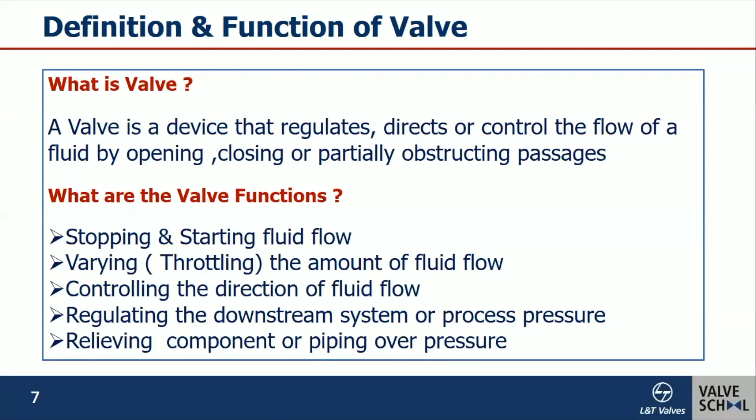You will all agree that if you want to have command on any subject, you need to understand the fundamentals very clearly. So that's what we are going to spend a few minutes on, understanding the valve fundamentals. Basically, there are two known ways of controlling the flow of liquid or gases. All the valves you see around you are, in essence, based on these two principles. Let's see what they are.

Imagine a water tank filled with water, with an outlet at the bottom. There are two ways by which you can stop the flow. One, by putting your thumb against the orifice, you can stop the flow. Or, if the tube is flexible, you can squeeze it and stop the flow. These are the two fundamental principles on which all the designs are evolved.

The first principle is again developed into three different methods. What you see here, the first principle is divided into three different approaches based on the way the stopper is presented to the orifice.

The simplest method of moving a stopper is moving by direct thrust onto the orifice, like what you see here, and this is the basis of all your globe valves. Imagine if the stopper is rotary, and by rotating movement, you can stop or start the flow. This is the basis of all your quarter turn valves: ball, butterfly, and plug.

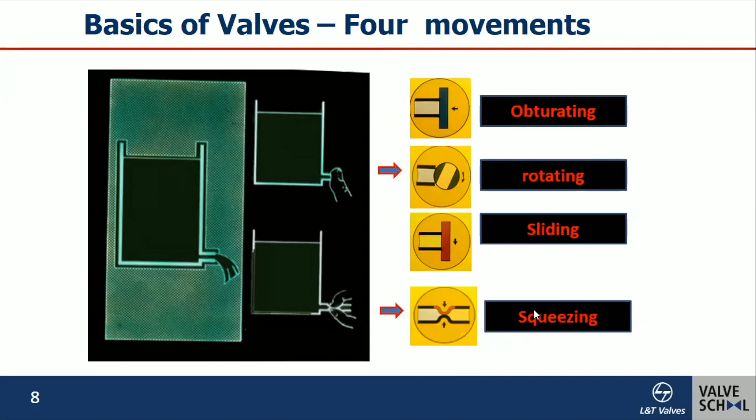So now let's see how these principles are evolved in making the design for valves. If you take a globe valve, you will find the closure device, which we call an obturator, is moved in a linear direction in the seating area, parallel to the flow, along the longitudinal axis.

And if you take the quarter turn valves like ball and plug, you will find the closure device rotates about an axis at right angle to the direction of flow. In the open position, you will find the flow taking place through the closure member. On the other hand, a butterfly valve is again a quarter turn valve, where the closure device rotates about an axis at right angle to the direction of flow.

But when the flow takes place in open position, the flow goes around the disc. When it comes to sliding gate valves, the disc moves in a linear direction perpendicular to the flow. And of course, the diaphragm valve is one where the deformation of this diaphragm gives you the tight shut-off. So we see 4 different movements of the closure.

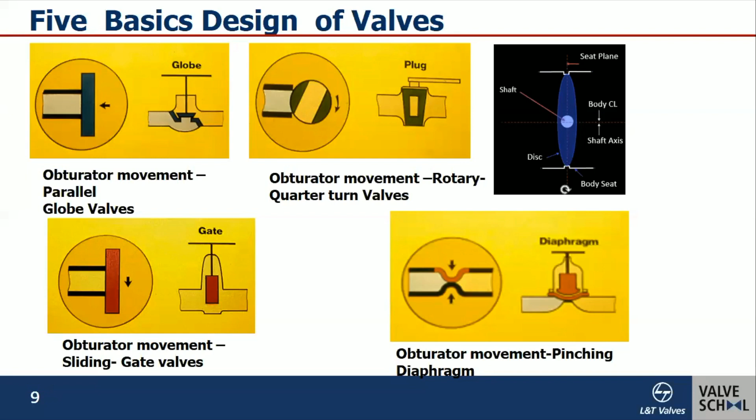We were able to develop 5 basic designs, and whatever we see around us can be fitted into this variant. This slide shows how different types of valves are fitted into these fundamental principles. And this is not an exhaustive list.

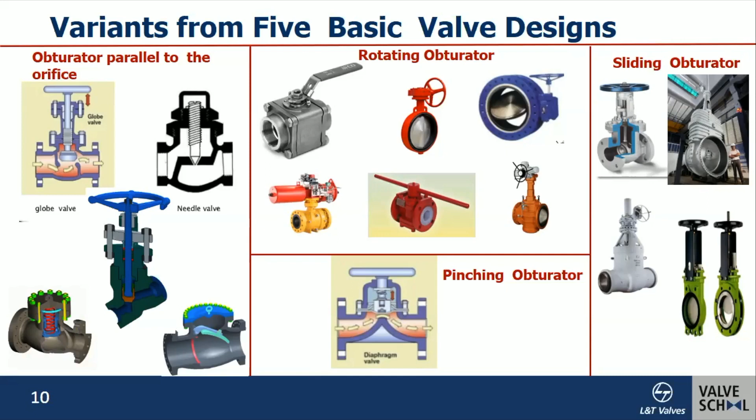Basically, from this categorization, we can have 2 categories. One is the linear motion valves, called multi-turn valves. The other, rotary movement valves, can be called quarter turn valves. So these are 2 broad classifications you will see.

Now let's move on to understand the characteristics of each generic valve. The globe valve, what you see here, is a globe valve. Its advantage is that the direct thrust of the disc onto the seat is seen here. This feature gives a tight shut-off characteristic for the valve. One can feel the valve is closed and is positive.

The internal flow, if you watch, takes 2 right angle turns. This gives a pressure drop, and this pressure drop characteristic helps this valve to be used as a regulating valve. This regulating characteristic is nothing but a known relationship between the movement of the disc and the quantity of flow.

And that's why you will find globe valves are more popular as a control valve. Another important aspect is that when used in throttling or regulating applications, the flow is perpendicular to the seat area, so there is even wear and tear. That's why, unlike other valves, these globe valves are able to sustain as a control valve.

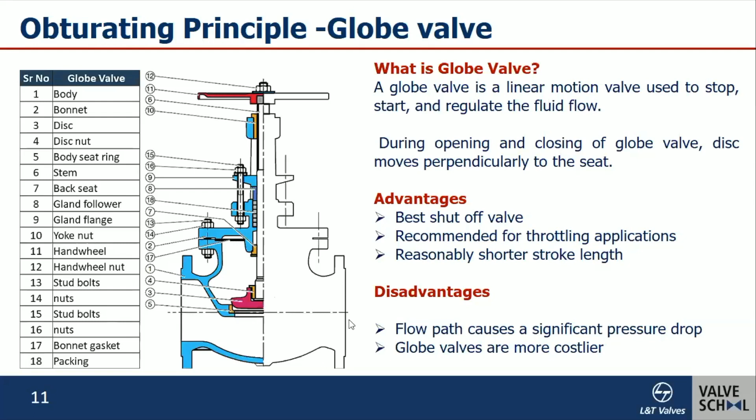Now let's move on to the plug. The plug belongs to the quarter turn category. It is straight flow through, and consequently the pressure drop is less. It is quick acting because it requires only 90-degree operation. Another advantage of the plug is that the seating area is protected from the effects of the flow. Hence it finds wide application in handling slurry media.

The disadvantage of the plug is difficulty getting a tight shut-off with ease of operation. Another disadvantage is that, because it is fast acting, it can cause water hammer effects in certain hydraulic applications. There are 2 types of plug valves.

One is lubricated and the other non-lubricated. Lubricated plug valves use lubricant, and non-lubricated plug valves use soft materials, elastomers, polymeric materials. This puts a limitation on the temperature, so temperature is limited by these materials.

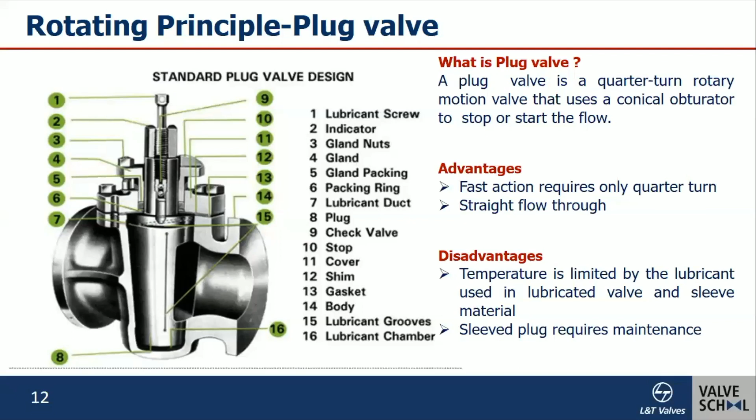Now let's move on to the ball valve. I would say the development of a plug is a ball. Similar to the plug, the ball also requires quarter turn movement and is also fast acting. The main advantage of the ball valve is flow is through and through, with no obstruction, offering the least resistance. That's why ball valves are very popular in cross-country pipelines where they need full bore valves.

The advantage of a ball over the plug is ease of operation. If you see the plug, the entire plug is enveloped in the body seat, whereas in a ball, the ball is in contact with the seat only through a segmental link, which helps give a low torque.

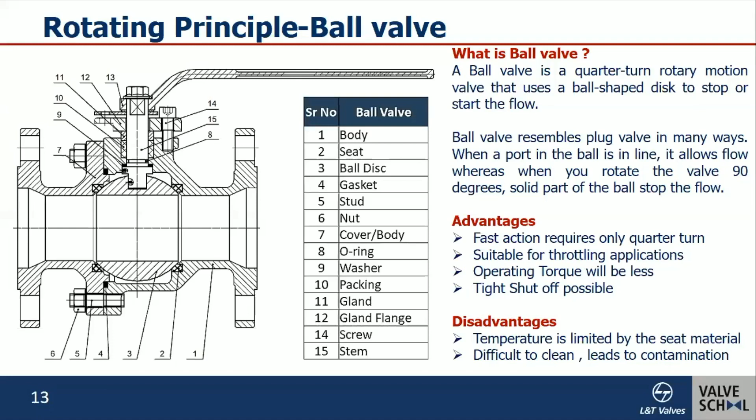In addition, using soft seats like PTFE, which has a low coefficient of friction, helps reduce the operating torque. So these valves are best suited for tight shut-off, suited for limited throttling applications, and best suited for fast action. The temperature is again limited by the seat material—there are metal seated valves, but soft seals used will put a limit on temperature.

Then we'll move on to the butterfly valve. It's again a development of a ball valve, I would say. It's quite compact, quick acting, and easy to operate. It is well suited for regulation. Next to the globe valve, I think butterfly valves are very popular in control applications.

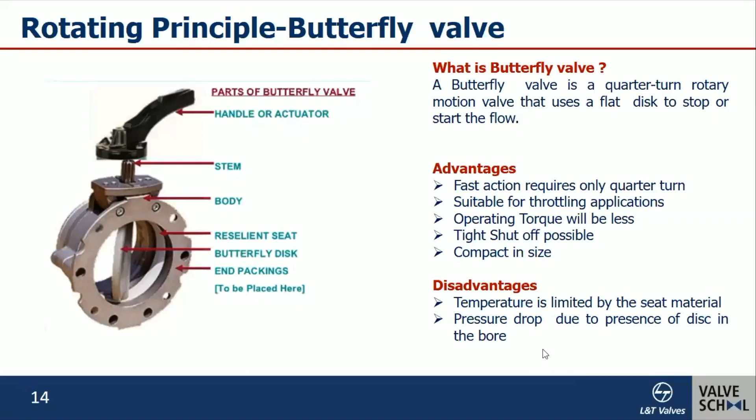The only disadvantage with the butterfly valve is that the disc is always present in the flow passage, hence it offers resistance, and the pressure drop is high. As a thumb rule, for a given size valve, the pressure drop in a butterfly valve is about 3 times that of a gate valve. It is also limited to smaller pressures, not high pressures, because for high pressure, the disc thickness becomes very massive and the flow area gets obstructed. Another disadvantage is when you use a resilient seat for tight shut-off, that puts a temperature limitation on this, and pressure drop is high due to the presence of the disc.

Then we have the most popular valve in the industry, which is the gate valve. Gate valve is a straight flow-through when the valve is open and offers the least resistance, least pressure drop. Being metal seated, there is no soft seat in the body of the valve, and it can be used for high temperature, high pressure applications. That's why you'll find more such valves used in the process industry, refineries, and wherever high temperature and pressure are involved. The disadvantage of a gate valve is that it is the slowest acting valve. Why? Because the wedge has to move through the bore to clear it to reach the fully open position. So wherever fast action is required, you have to stay away from the gate valve.

The second disadvantage is it requires a lot of headroom. And this valve is not suitable for throttling application. It is best suited as an on-off valve. In throttling application, when used at an intermediate position, the disc is subjected to vibration, and a lot of wear and tear takes place. Hence, it is not recommended for throttling.

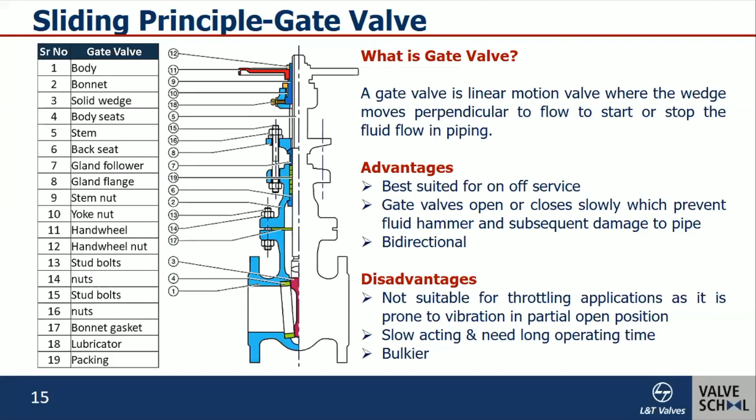Then we have diaphragm valves, which are also called glandless valves. There are 2 advantages of diaphragm valves. One is the diaphragm is flexible and gives a positive shut-off. That's why it's suited for all slurry or solid materials. All your sewage lines will use this type of valve. The disadvantage is that due to the diaphragm material, the temperature range is limited.

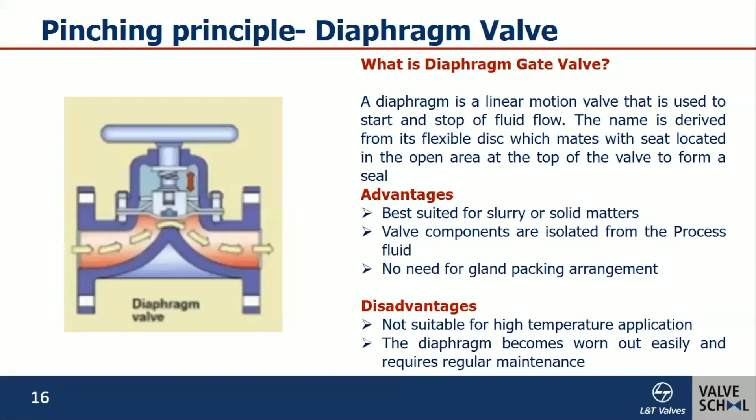To summarize, the 4 basic variants' advantages and disadvantages are shown in the slide. I don't want to repeat it. All I want to say is quarter-turn valves are quick acting, and except for the butterfly valve, the rest of the quarter-turn valves like plug and ball have the least resistance. In the multi-turn valves, globe and gate, they require a longer time to operate. The globe valve is best suited for on-off as well as regulating applications, whereas the gate valve is suited only for on-off application, not for regulation. So it is better to understand the differences between these variants, so that when you select or use a valve, you will be able to remember these characteristics and apply them in your day-to-day work.

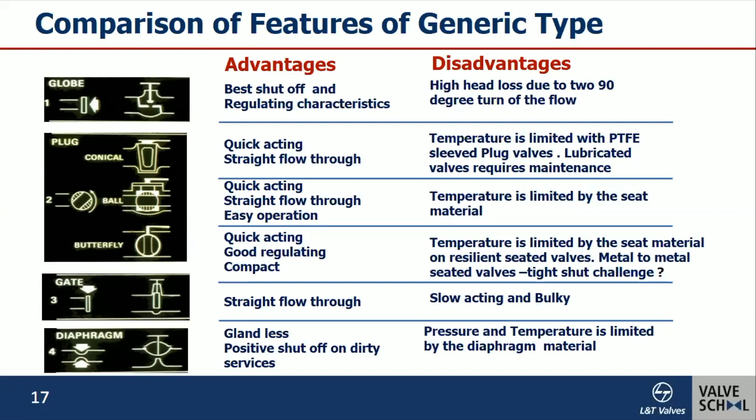Now, having seen the basics of the valves, we'll move on to the important topic of valve parameters. In order to get maximum benefit from the valve and reliable performance throughout its life cycle, we need to select the right type of valve. To select the right type, we need to specify it correctly to the manufacturer, matching the application. That is where valve parameters come into play. A valve parameter is really a valve specification that goes to define a valve. Both the valve manufacturer and the end user should be familiar with these parameters. Let's see what these parameters are.

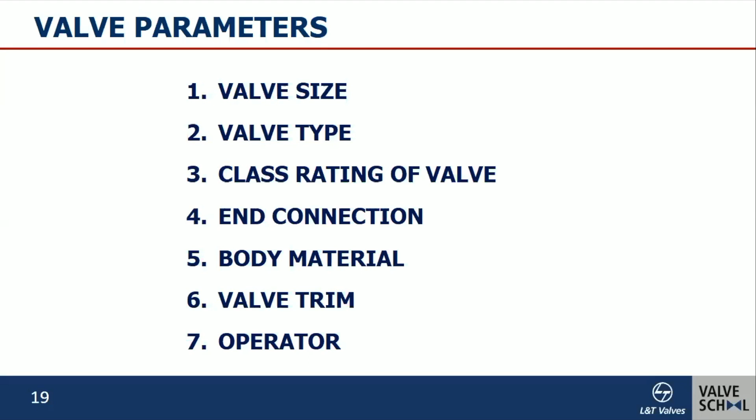I've listed out 7 essential parameters, starting from valve size, type, class rating, and connections. This is not an exhaustive list that goes to define a valve. If you see a valve data sheet, you'll see design pressure, design temperature, process flow media, noise level if applicable, the type of packing, and all those things. All of this goes to define a valve. But these are essential, and let's see what each one represents. Let's take the valve size.

If I ask a layman what valve size means, he will say it's some dimension inside the valve. But when I ask this question to people familiar with valves, you will say that valve size is nothing but the pipeline size onto which the valve is going to be mounted. It has nothing to do with your valve dimensions.

There are two methods by which the valve size can be represented. One is the imperial system, the inch system, used still in countries like the US. It is represented as NPS, nominal pipe size. The other system is the metric system, SI system, where lengths are measured in meters and weights in kg. Here the valve size is mentioned as DN 200 or DN 250. DN stands for nominal diameter. So NPS2 is equivalent to DN 50 in terms of representation.

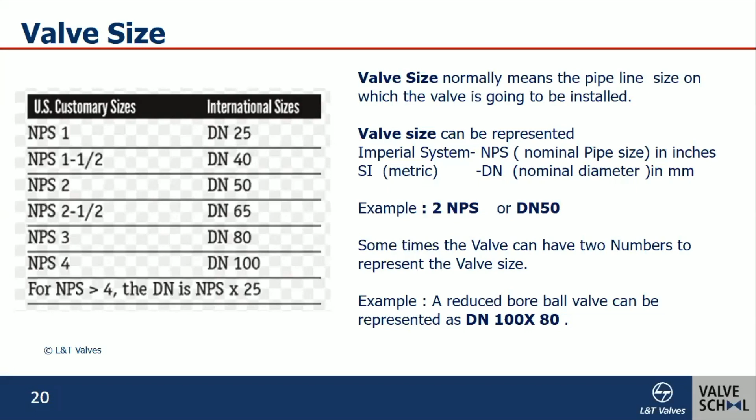Sometimes valves are designated by 2 digits. What does that mean? It means the valve is a reduced bore valve. When you say a valve DN 100 by 80, it means the ends are suitable for mounting on a 100 mm pipe, whereas the valve itself is for 80 mm. Similarly in plug valves, the size is suffixed by the letter R, which means it is a reduced port valve. So a 16-inch R means you can understand it is a reduced port valve.

So let's understand what is that valve type. We saw the basic type, but classification based on functions is what is really required for selecting the valve.

Basically, valves can be used for isolation. Isolation is a valve designed for use in fully open or fully closed position only. All these valves - gate, ball, plug, piston, diaphragm - are meant for isolation.

Regulating valve is a valve designed for use in any position, between open to closed. You'll find the globe valve comes at the top, followed by other valves.

Safety relief valve, as the name implies, is meant for relieving pressure. It does so automatically when the set pressure is reached. A non-return valve, sometimes called a check valve, is basically a unidirectional valve - it opens in one direction and closes in the other.

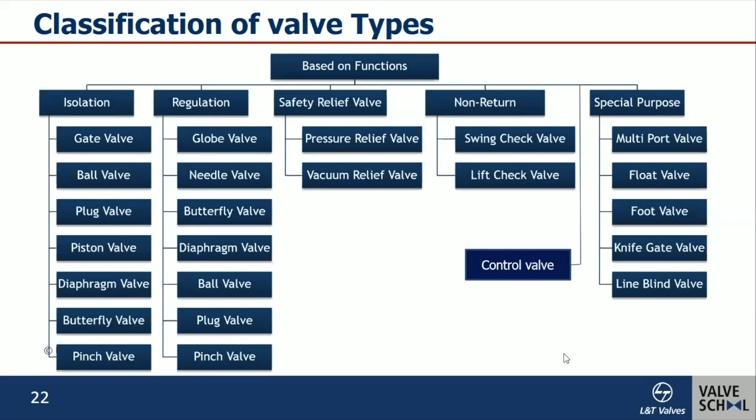And then, of course, we have the control valve. A control valve is a power operated device which changes the flow rate in a process control system. It contains an actuator capable of changing position based on the signal received from the control system. There are also other types of valves based on their application, like float valve, foot valve. This is a classification, and one needs to be clear what purpose it is required for.

Then we'll move on to the class rating of the valve, which is a very important aspect. A valve is designed to handle a certain range of pressure, and there is a limit to the pressure it can be subjected to. This is called the pressure rating of the valve - the pressure carrying capacity of the valve. Normally, pressure carrying capacity is not constant with temperature.

It goes down with temperature. That is why the standard ASME B16.34, one of the oldest standards, made an attempt at standardization in the valve industry. It gives the pressure rating for different groups of materials.

So how is it represented? Like what you saw in the size, here too, in the imperial system, the valve is represented by terms like class 150, 300, 600. Class 150 doesn't represent any actual pressure value. You should look at the pressure-temperature chart, which will say that at room temperature, 285 is the maximum pressure carrying capacity. As the temperature goes up, the pressure rating drops because the material loses its properties.

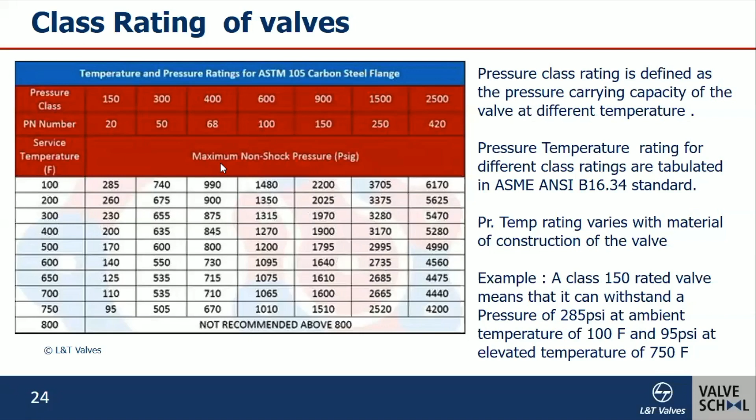Apart from the imperial system, in the metric system it is designated as PN10, PN15, PN100. PN stands for nominal pressure. There are different class ratings - what you saw is the standard class rating listed in the standard, and this changes with material groups. Now there's another class called special class rating, used for higher temperatures. Instead of going to the next class, the standard allows you to use a special class under certain conditions, like carrying out an NDT on the valve body.

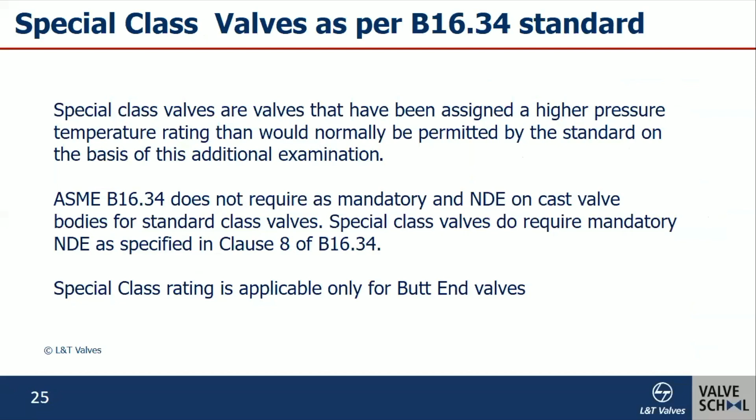Let's see an example. In this table, the top shows the standard class and the bottom shows the special class. Example: your process temperature is 800 Fahrenheit and pressure is 500. If you were to select a valve from the standard class, one would select a class 600 valve, because at 500, only class 600 will be suitable.

Whereas if you take the special class, you end up choosing class 300. That means your valve size is reduced, cost is reduced. Why? Because in the calculation for valve thickness, there's something called the casting quality factor. When you do an NDE, like radiography, on the valve body, you can use a higher casting quality factor. Thereby, for a given valve thickness, you are allowed to operate at a higher pressure. So you see a difference: class 150 standard is 80 psi, whereas special class allows up to 195.

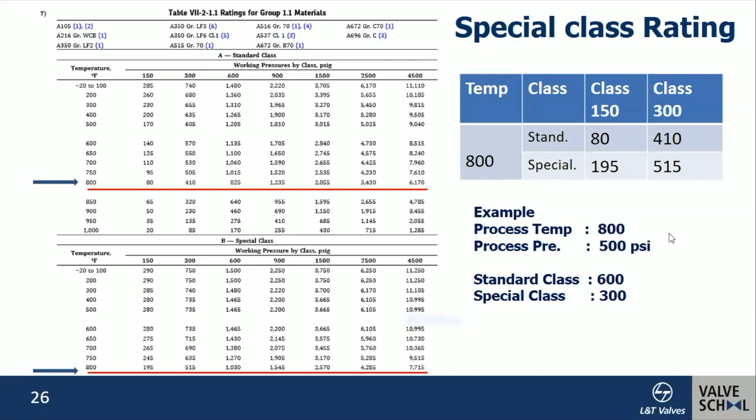Let's move on to the next category: intermediate rated classes. Similar to special and standard class ratings, there's an intermediate option. The standard gives an option to use a design intermediate class like 3300. When you find your pressure-temperature is between class 2500 and 4500, and you'd be forced to select class 4500 because no intermediate is available, the option exists for you to engineer a design and select a design intermediate class, say class 3300.

If you have a pressure-temperature in this range, you can call it class 3300. The only thing is, though this design gives advantages in cost as well as weight, it requires engineering effort from the customer's point of view.

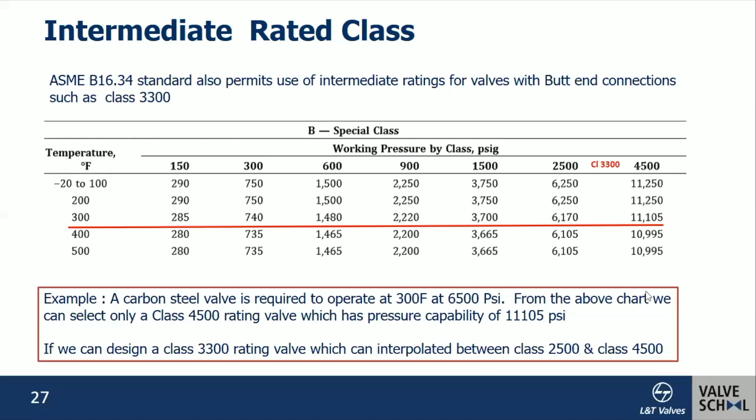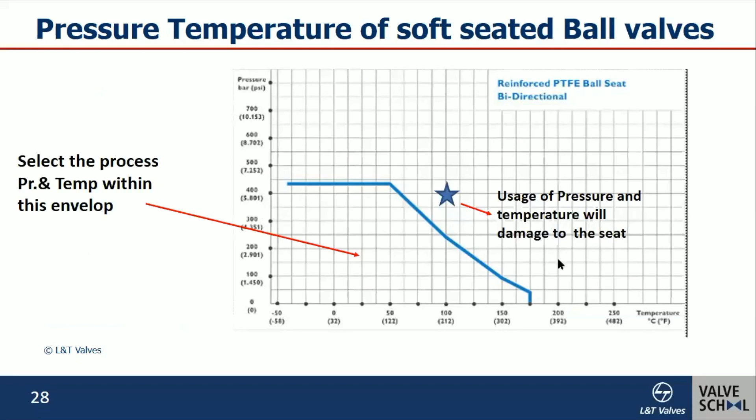There are a number of different end connections available for joining the valve to the piping system. The most popular are these: screwed ends are more popular in small sizes up to 2 inches, and flanges are the most popular for larger sizes.

When you want a permanent joint, you would go for a welded joint. There are two types: one is the socket weld, popular up to smaller sizes, 2 inches, where the pipe goes into a socket and you do the welding. For larger sizes, you go for a butt weld end. These butt weld ends are permanent joints widely used in high pressure, high temperature applications.

What you do is have two lips machined on the flange side as well as on the pipe side and the valve side, which are butted against each other. Then at the end, you have a U groove or V groove which is filled with weld metal. This gives a permanent joint, widely used in applications like buried service or high temperature application.

There are a number of variants available for flanges. It could be a raised face or a ring type joint gasket. Depending on your service, one would select a material.

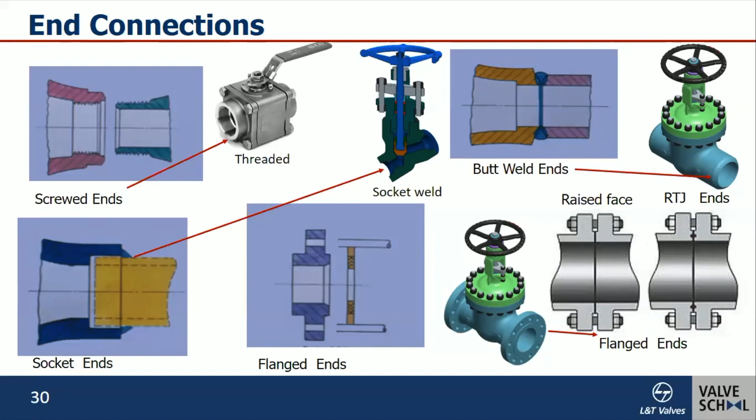Let's move on to body material. Basically, valves are exposed to pressure, temperature, and corrosion from the line media. Hence, standards regulate the use of materials for valve construction. Traditionally, the valve industry has evolved around codes and standards, and materials are dictated by standards like ASTM, the American Society for Testing and Materials, which specify what type of material you should use for a particular application.

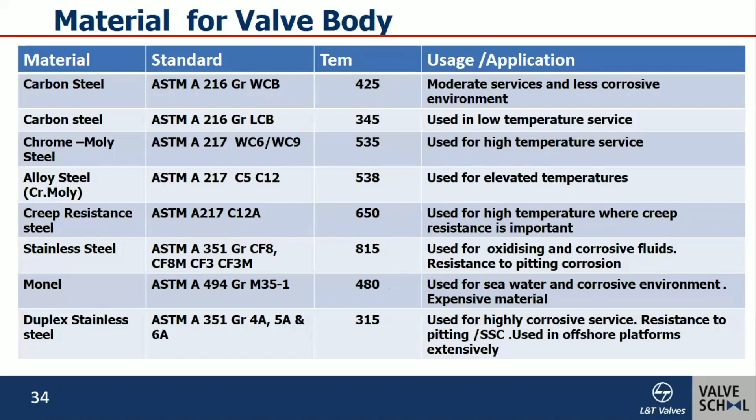A popularly used material is carbon steel, standard ASTM A216 WCB, which has a temperature limit of 425. When you use alloy steel for high temperature applications, one would go for a creep resistant steel like C12A, where the temperature limit is 650. There are a number of materials available, listed in standards like ASTM, and another standard is ASME, the American Society of Mechanical Engineers, which also designates standards, and both ASTM and ASME will have the same designation. Let's move on to the next parameter, which is the trim.

Trim is a collective term used to denote certain internal surfaces which are wetted and wear prone. The trim refers only to the surfaces, not the base material. You'll find trim material descriptions in the product valve standards. For example, in an API 600 gate valve standard, the wedge, backseat bush, body seat face, and disc seat face are all trim. Similarly, a ball valve standard will tell you body seat and ball seat are trim materials. Basically, the trim is selected based on your service condition.

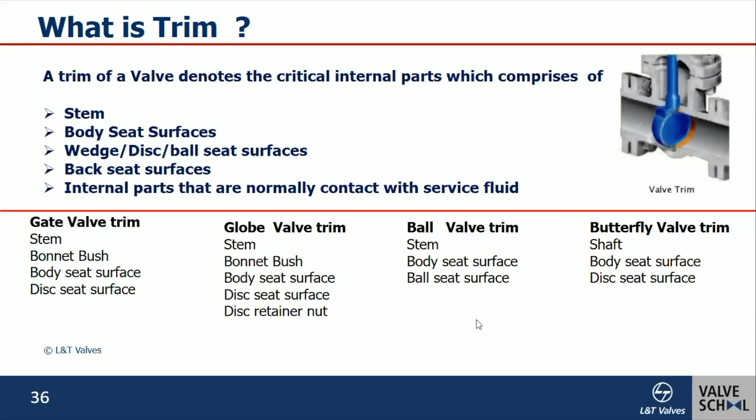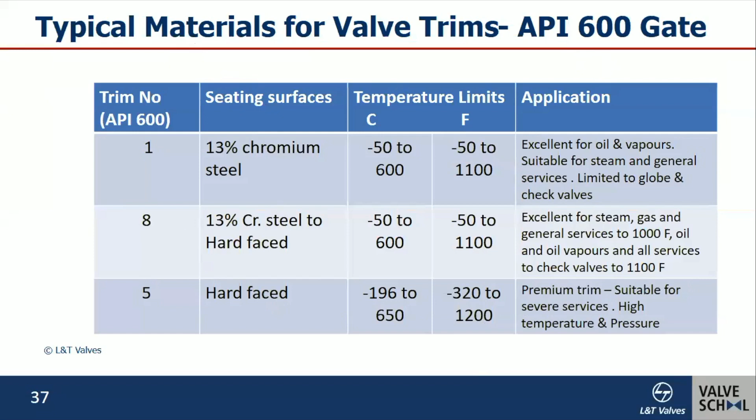What you see here is a trim chart which I extracted from API 600. If you go through the standard, it will give a number of trims. So when you say trim 5, what does it mean? The seating surfaces in the gate valve are the wedge and the seat ring, and both will be hard-faced using stellite. What was the application of this? It's basically a premium trim used for high pressure, high temperature, and severe services. Likewise, there are trims like monel, which is used for oxygen service. One has to look at the standard to know the allowed trims.

And then of course the valve operator, which is the final valve parameter. What do you understand by valve operator? Any device which is used to provide a force, leverage, mechanical action, or torque to open or close the valve, or regulate it in an intermediate position, is called an operator. So what are the valve operators? It could be either a manual operator, a power operator, or it could be automatic also.

So manual operators - what are they? Simple devices for small sizes, like a hand wheel. For larger size valves, one would go for a gear unit, because the gear unit has a mechanical advantage which helps reduce your effort. If you're going to use a valve at higher locations, you can use a chain wheel to operate it. And then of course, the powered actuators are electric, pneumatic, or hydraulic, or a combination like electro-pneumatic.

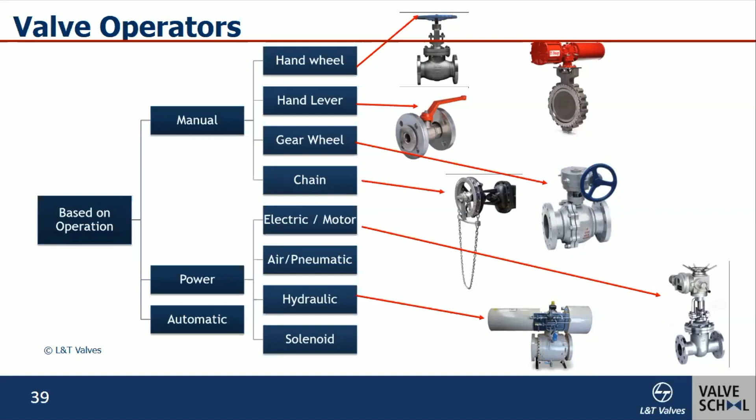The type of operator selection is decided by the customer based on a number of factors like valve size. One would like to operate a large size valve using an actuator - no one would like to operate a 72-inch valve using a hand wheel, as it would require thousands of revolutions to open it. Similarly, in critical applications like emergency shutdown valves, you need actuation using pneumatic or electro-hydraulic systems so it can operate in case of any emergency. So these are the different operators, and why do we need actuation?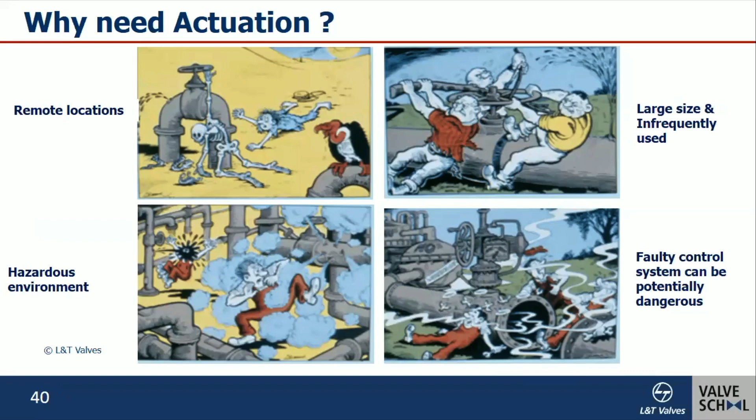I think this cartoon is self-explanatory. As I told you, for large size valves, you better have an electric actuator. If you're going to use the valve in a remote area, it's ideal to actuate it - you don't want to send so many people to operate the valve. Or if you have a hazardous application environment, then probably you'd have an actuator. For example, in the nuclear industry, for any valve used in a contained area, you would not risk sending an operator to operate the valve - it's ideally a power actuator. And sometimes when you want to operate a valve in a sequential manner, you obviously go for actuation.

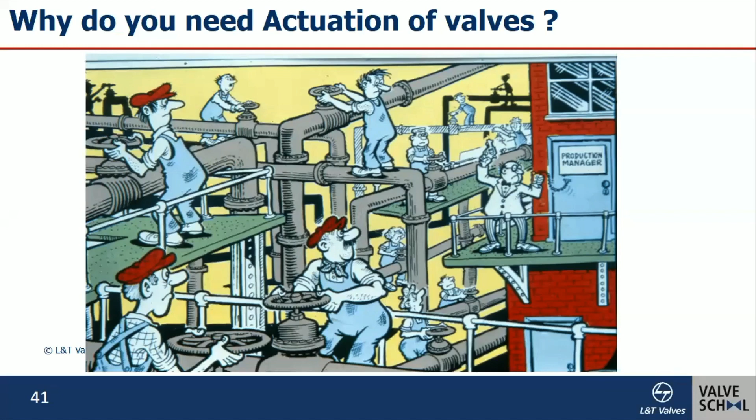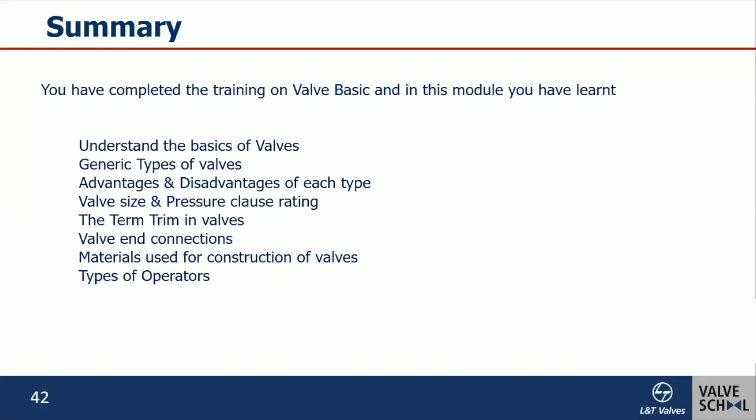So we come to the final part of the session. We understood the basics of valves - the 4 types of movement of the obturator or closure device: direct obturator movement, sliding, or rotary. In the rotary type, we saw 3 types of valves: ball, plug, and butterfly valve. We also spent some time briefly on these generic types, their advantages and disadvantages. Then we spent time on valve parameters - we understood what is meant by valve size, pressure class rating, the term trim, and the connections. Within this short period, what was attempted was to give an exposure and overview of all these valve basics. It is expected that people who want to become experts on valves should go further deep into it. So with this, I conclude my session.